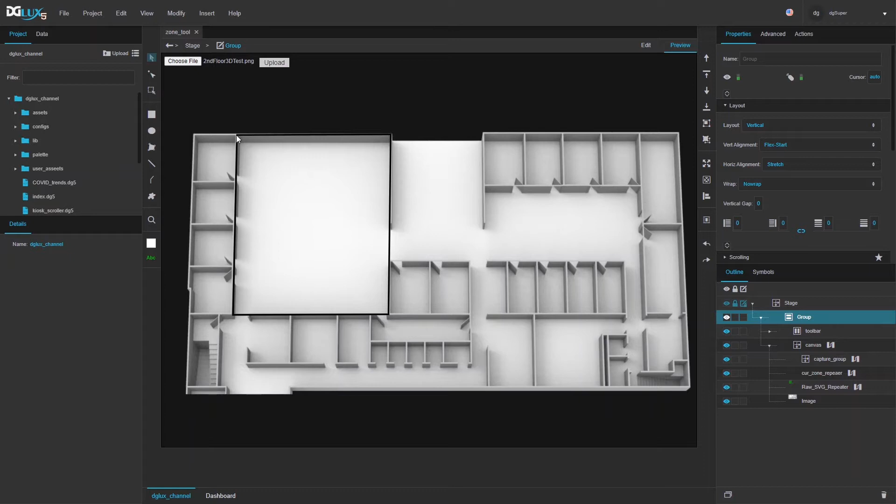One improvement that I want to make right away, which I noticed as I was playing with this tool, is that right now I'm tempted to try and finish the polygon by going back to the origin, which I actually don't have to do or should not do, right? Because when I double click, it will finish it for me. It'll draw that last segment for me. But because intuitively I'm trying to finish the polygon myself, I always end up with one extra vertex somewhere here, because at the last second I remember, oh yeah, I could have just double clicked on the previous one, but now I'm here, so I have to double click.

So we're going to address that first. Basically, what I want to do instead is to always have a closed polygon so that it's pretty clear that you don't need to finish it off yourself. So for that, let's travel to our capture group. This is where, if you recall, the currently drawn zone is being generated. And here it is, right? So this is the block that creates the concat of the zone that's currently being drawn.

So let's go ahead and start drawing it like this, and we'll just keep it here. So here, if you notice, this is basically what I've already plotted, the set of coordinates I've clicked, and I'm adding the current X and Y of the mouse, and that's what is drawing my black lines here. So in addition to doing that, I'm going to add one more coordinate. It's going to be a space, and then one more coordinate that will connect my mouse to the origin.

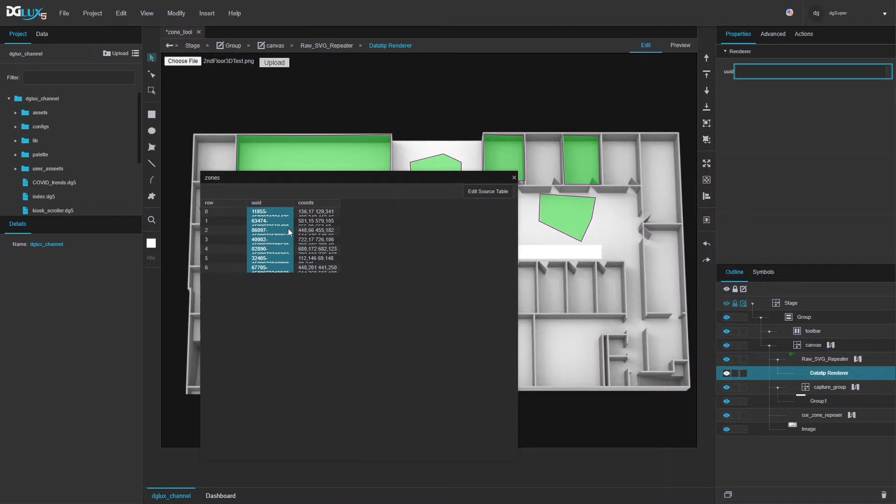And I need to open my table, go to this renderer that I now have here, the data tip renderer. Unfortunately, I cannot edit this in place, so I cannot do right-click, edit. Otherwise, everything would have been much simpler. This will be available soon, but it's not at the moment. So I need to take UUID column and bind it to my UUID property of my renderer. It looks like it's already pre-bound, I think because I was playing with it earlier, and it just kept the binding in memory. Ignore that. So basically just take UUID column, not a cell, but a whole column, and drag it over.

So now, if I did it right, when I mouse over a zone, I should see a data tip with the zone's UUID, right? And that's exactly what I'm seeing. And each one has its own, so I'm not seeing the same thing over and over again. Perfect. Now I need this same data tip to write it to this block here. So I'm going to go back and edit my tooltip. But because I cannot edit the renderer, I go to the one that's already sitting on my screen here and edit it from here. And data flow. And this is the non-intuitive part.

So I'm going to use a state block. Now, the target of my state block. So this state block will write that UUID. It has to write to the outside of the Svg repeater. So I cannot drag anything here to populate this path because I'm inside a symbol. And also I'm inside a symbol instance that is a completely different context compared to what it will be when it's rendered inside a Svg repeater. So I cannot populate this target path by dragging. However, I can type, and that's what I'll do.

So at stage, now this gets you to the symbol root level. Then at parent, this goes one level above the symbol, basically outside, which would be your Svg repeater. Then dot hover zone, that's the name of my string block that I designated. I want to keep my zone ID that I'm hovering over. Dot value is the property that I'm trying to affect.

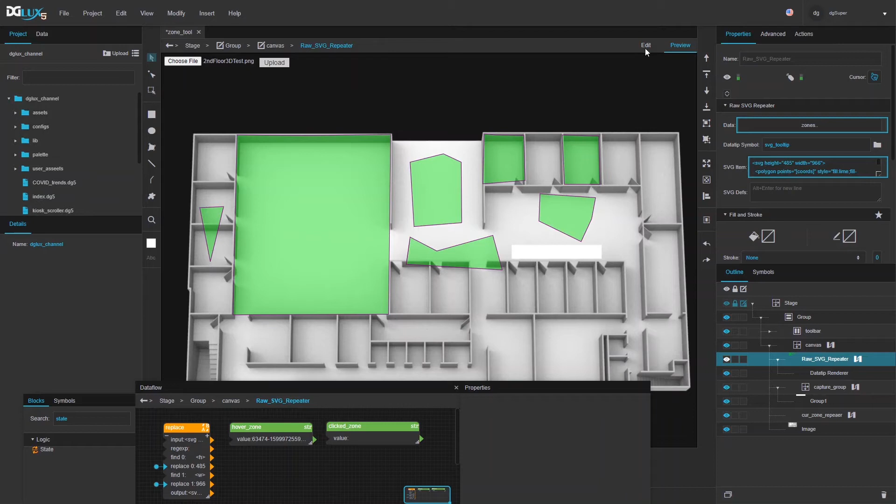However, what is not happening is I'm not clearing it out when I hover out of the zone. The last hovered zone ID is still there, so I don't know technically if my mouse is still in the zone or not. So we can fix that by force clearing it out when I'm over the capture group. Remember, because in between the zones, the capture group captures the mouse.

So I'm going to use a state block. All right, so my target will be, of course, this, my hover zone. So value will be null because I want to clear it out.

I also want to enable disabling serialization so it does not get serialized. And by the way, I have to do the same inside the symbol, so clear it out here as well, so it's not going to get saved with the page.

I'm going to invoke this state block on the mouse move of my capture group. So basically, anytime your mouse is over the capture group, it will clear out my hover zone.

Okay, so let me go ahead, while I'm still remembering, I'm going to go into my SVG tooltip and turn off serialization on this state block as well. Again, it's a good practice to do that on any state block where you don't want the value that it writes to be saved with the page.

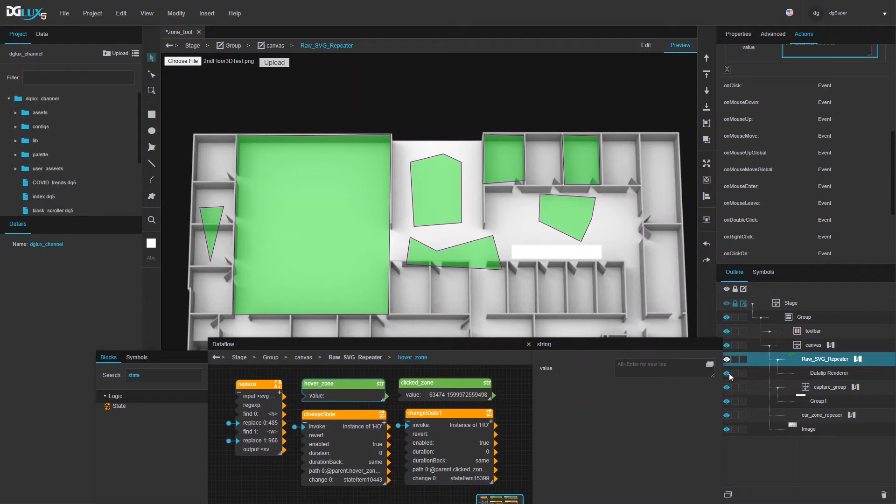Now we're ready to actually change styling based on that information. Okay, so for that, let's go ahead and get both of those values, take them with us.

So we'll have to come back here and go to the logic of my SVG code, which is, I believe, somewhere... yeah, actually, it's right here. So in order for me to be able to insert parameterized values, which would be, of course, the opacity and the fill color, into my SVG code, they have to exist in the table. Otherwise, I can only hard code them. Hard coding would not work here.

So first, I need to go back to my table that contains all my zones, which is here. Right now it only has UUID and coordinates. I need to add a few more fields, but not literal fields, because I don't need to type values in them. I need to use a column mapping block to add two more columns, which will be calculated.

Right, so input will be my zones table, and of course I'm taking all the original columns with me. I'm adding a column called opacity, I'm just going to use OPP, and one more called color, like so. And they're going to come, let me move this out of the way, so their values will come from an expression.

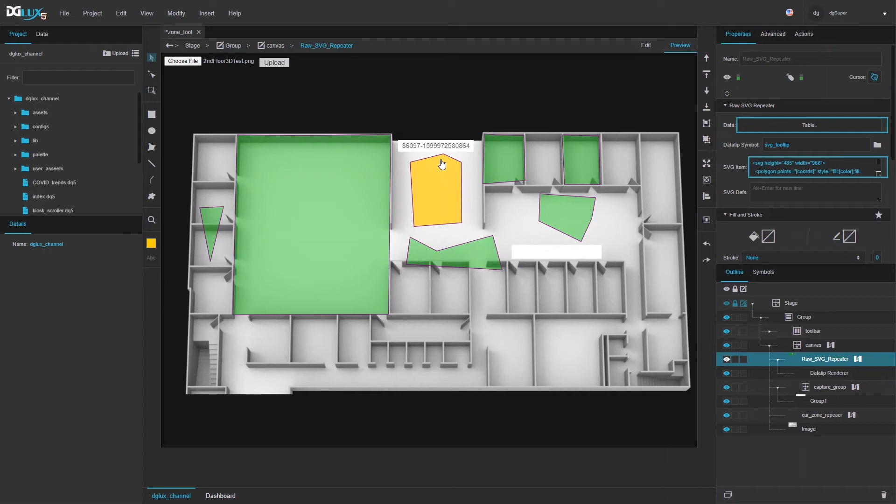Now that it works, we are ready to actually visually hide this data tip, as we don't actually need any visual aspect of it. I'm going to go back here, edit this, and simply turn off visibility. And done. I can delete it from here now - remember, I'm not deleting the actual symbol, I'm just deleting this instance that I used to edit the symbol. The symbol itself is still perfectly happy here in my symbols.

So we have a drawing tool that knows basically when you hover over a zone and when you click on the zone. We're ready to make use of this new functionality.

The first thing that I want to do using this is add the ability to delete a zone. Right now we have no way to delete it there other than going to the table and manually deleting a zone that we don't need.

So let's go ahead and add the delete button. We can add it right to this toolbar on top. I'm going to insert another group laid in there, horizontal laid out, flex end basically, so components will be stacked on the right and vertically centered inside. Let's call it tools. Inside I'm going to add a button - just regular text, saying delete. It's going to be white text on a red background.

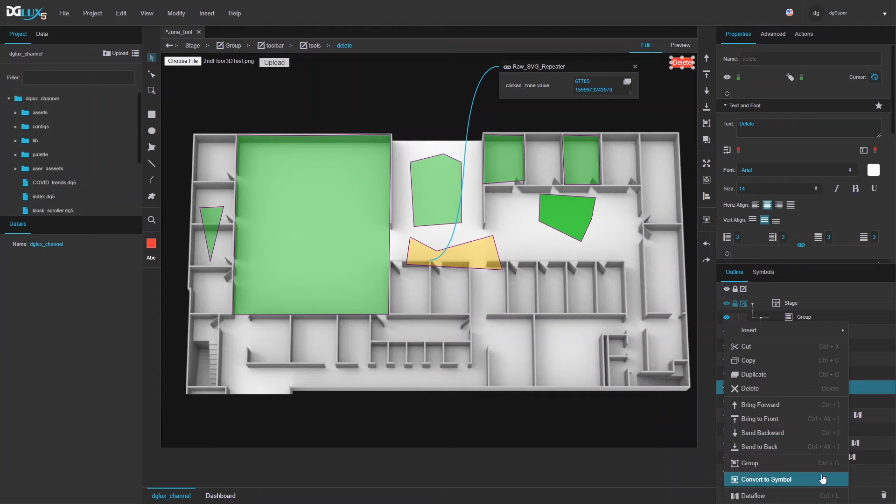Go to our button. Oh yeah, one more thing. Need the actual table that contains all the zones, because to delete anything, we actually have to delete it from this table. So take both with us, and now go back to the button, and let's create some logic.

So if you remember prior lessons in this channel, we're going to need to use remove rows to delete something from a table. And so this zones is the table, that's the target.

We need a condition. The condition will be dynamic because we need to check for this UUID. That means replace block or concat block, depends on your preference. And again, expression - actually no, here we don't need equals. This is not a column mapping block. So here we can just say UUID equals,

UUID. Right, so UUID is the column name, and this will be our placeholder, which we are going to replace right here with actual UUID. So that's the expression that we'll get, and we'll use it in our condition here.

And of course, the click of the button is what's going to execute this. However, oh yeah, one more thing I want to happen after that is executed: I want to make sure that we clear out the clicked zone, right? Because right now, if we delete a zone, this value will stay in there, but the zone will no longer exist.

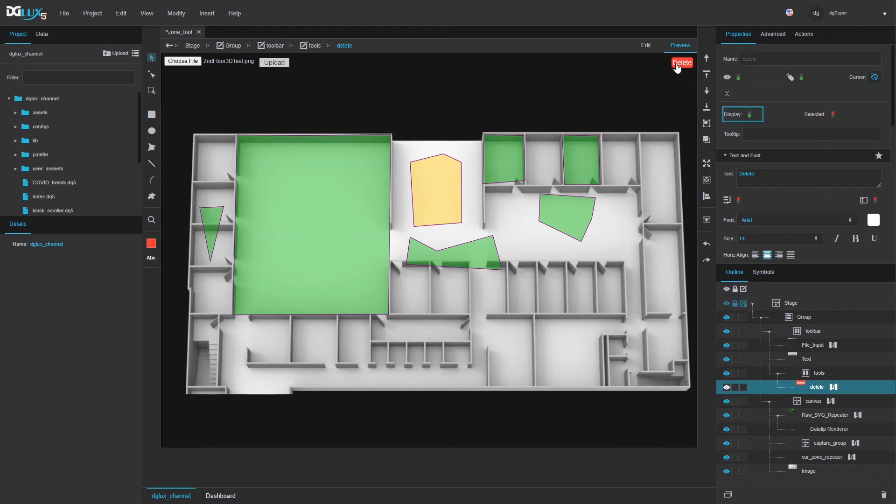Data flow doesn't tell us anything interesting. So click a zone, you delete, right, done. Click a zone, you delete, and we're done. Okay, so that part works pretty well.

Next step - so we can now create a zone, we can now delete a zone. We need the ability to add some information about that zone. Just want to stick with two properties for now, name and node. Node would basically be a path of the device that controls that zone. In my case, let's say a VAV.

All right, so I have a VAV box mapped somewhere in my server, and I want to keep the path to that VAV with the zone, so later, when I render this somewhere else, I know where to go for data. So for that, we're going to need to create a simple form. Let's get started with that.

All right, so we're going to start by just adding a group. Everything starts with a group. And giving the group some basic sizing, maybe 300 by 250. Give it a background so we can tell it apart. I'm also going to give it a box shadow, so it appears to be over things, and some rounded corners because I like them. And I'm going to make it a symbol right away. So convert to symbol. I'm going to call this zone data.

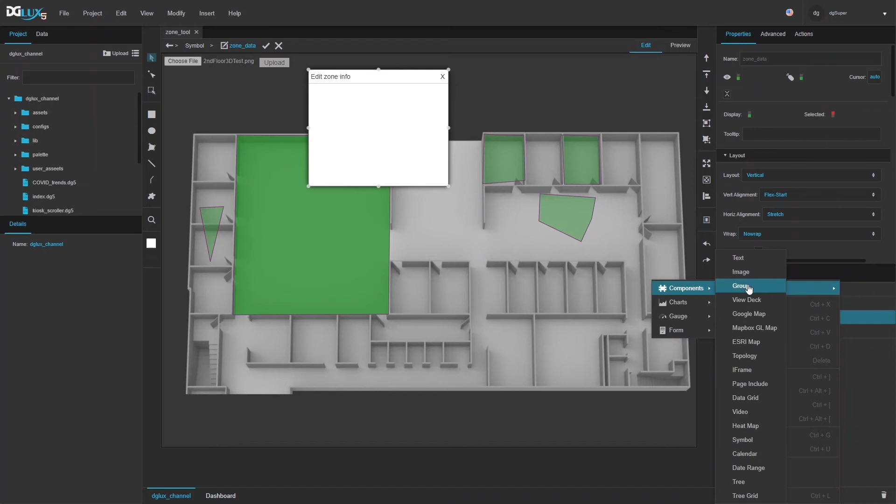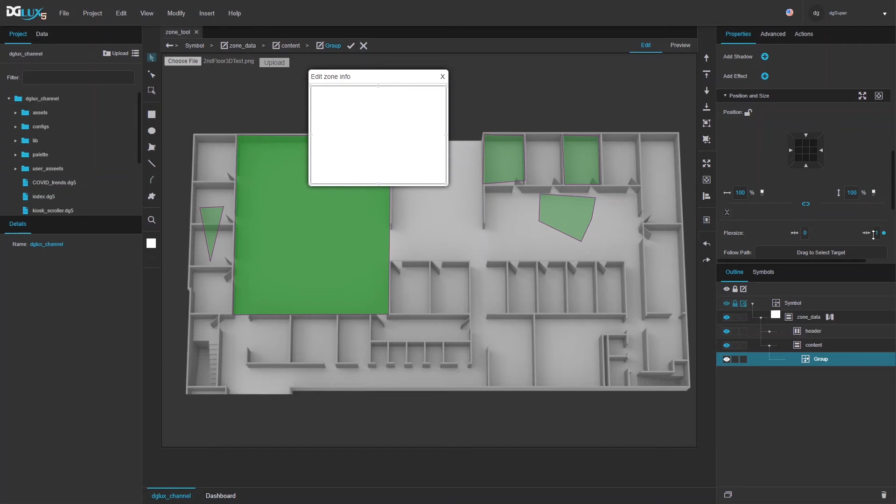So next, I'm going to add a group. I'm going to call it content, and that's the one that's going to contain the properties that I want the user to fill in. Add some spacing all around, and add another group, which is going to be a single property. So full size and no shrink. And fixed height, right? That's going to be the group. Horizontal layout, center vertically. Another text in there.

So text. This is going to be the name of the property, or label, that is. I'm going to make it fixed, 90, just so that things are aligned when I have multiple. Right, so this is going to be zone name. Let's call this prop. 10 pixel gap. And I'm going to insert a form element, text input. Right? This is where a user will be able to type things in. 100% wide, but flex, shrink, and grow enabled, so it only grows enough to fit 30 pixels.

A little bit of rounded corners, frame around it, and white background. All right, and need to give it a little spacing on either side, like this. So primary font will be dark, very dark gray, and then placeholder will be kind of barely visible. So remove the text value from here and set placeholder as zone name. And so you just prompt it to enter the zone name.

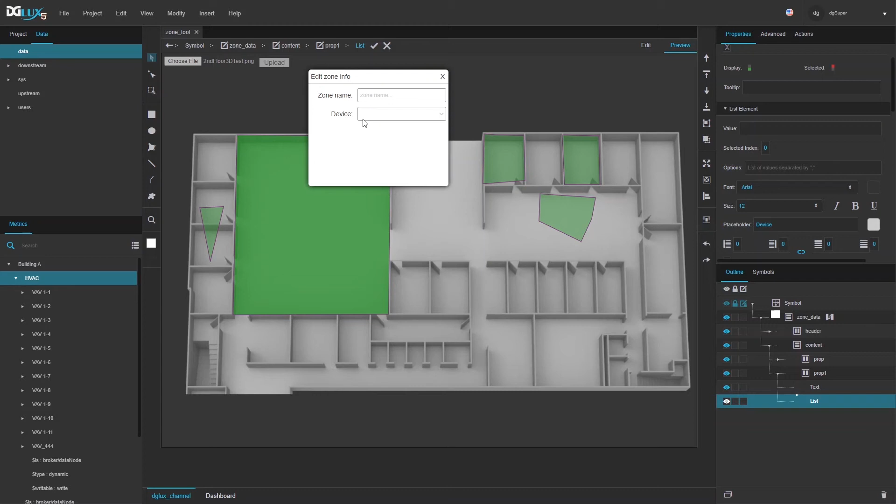So where am I going to get values? Well, if I recall from prior lessons, I have some mock VAVs created here. Let me go ahead and delete the new node. Don't need it. So I just have VAVs and nothing else here. I'm going to use these to populate my list. So I'm going to use list node, and I'm going to use HVAC as my parent, holding control so it doesn't bind, but rather populate the path.

And so this is what it gets us, right? What I care about is name and path. But what I want is a combination of these two. So I can use comma-separated values where each value is a colon-separated label and value pair. Let me show you what I mean. I'm going to use column mapping block. You see that I use this block a lot, and that's the case. It's one of the most commonly used blocks when you work with data.

So I'm going to call my new column value. I'm not going to take any other columns with me, right? And value is going to consist of name column plus colon plus path. Right, so this will look like this as the result. So name, then colon, then the path.

And you have to be careful. If your name could be strictly numeric, then this may error out because it's going to try to add a character to what it thinks is a number. So in this case, you would have to make sure this does not happen by first casting it to string type like this, and then it won't try to do math with your name. Instead, it will actually do a character operation by adding that column.

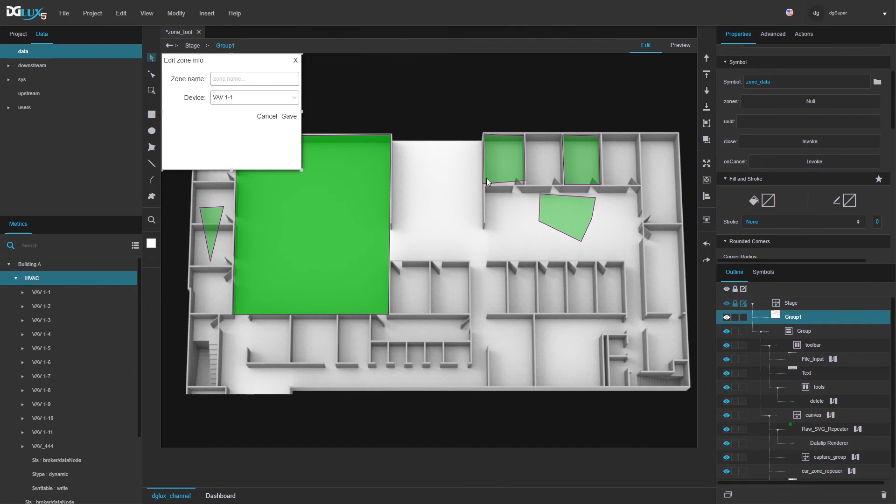So with that, I'm going to save the changes. I'm going to delete this from here, that instance that I created. It's still here in my symbols. And I'm going to actually use it as a callout on my canvas. Right? I cannot add a callout to individual zones because they don't have a callout property. I may want to have another callout at some point, so I'm going to add a callout to the SVG repeater itself. So I'm going to expand the callout section.

Remember, you can add a callout to just about anything. So I'm going to choose this type of callout that comes with 2 events to show and hide the callout, and just center it on screen. And I'm going to use what I've just built, which is zone data symbol, as the symbol for the callout. There it is, nicely shown here. 0 animation on load, so it doesn't fade in, but rather just appears.

I am going to make it modal, so nothing else can be touched while it's popped up, and kind of gray out the rest of the screen a bit so you can tell that nothing can be touched. So auto size it. Right? This is where those settings where I set auto size and height pay off. And that's it. So this is my callout render here.

So now I can grab my close event and just bind it straight to the hide trigger, right? Because we know what's going to close the callout, this close event, which nothing triggers yet, but we'll do that inside the callout. Right, show trigger. So what I think I want to do to show is a right click. Rather than using this clicked state, I want to use a right click on the zone to show this pop-up. But I want to make sure that I'm over the zone when I'm right clicking, and only then show it.

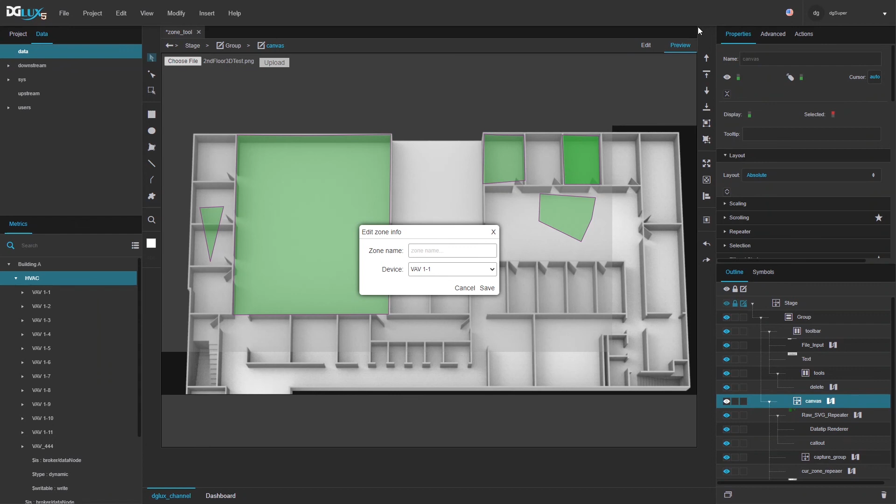Otherwise, there'll be nothing to edit. So name and path. Now let's watch the magic happen. All right, so we'll just keep this table open and cross the fingers that everything works. So close it out. Well, we know the close works now.

So let's do right click. Let's call this zone meeting room 1B-A. The device that controls it will be VAV 1-3. And we're going to save. Oh, we ran into a small bug in here. Looks like we lost.

Yeah, that's okay. So that's going to happen because of how these form controls work. The modality of the callout is not always enough. So when it goes from your drop-down list back to the form for the brief moment, it will actually detect a mouse underneath and think that you moused out, which is bad. We don't want that because when you mouse out, you lose that ID.

So now this form is sitting there without an ID, so it cannot save anything to the table because there's no ID to match. So let's fix that. So to fix that, instead of binding UUID to the form, which basically will appear and disappear as you mouse in and out, we're going to write it. So unbind, pop it up. We're going to write it and then on the right click.

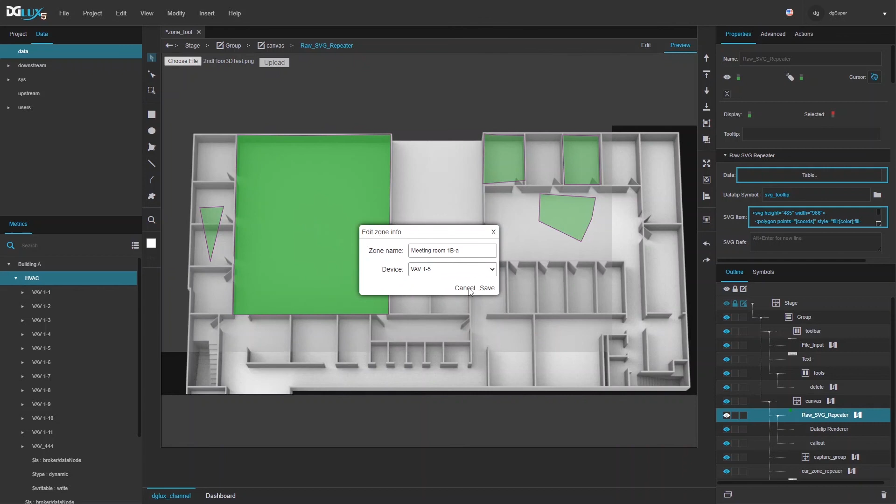When I pop it up, it shows that it's already there. So let's go to another one. Here, nothing is here. So let's call this Bob's office. Hopefully this apostrophe is not going to kill us here, but it shouldn't. 1-6, save. So when we go back here, this is meeting room 1B. We go here, right click. This is Bob's office. Okay, so one last step, I promise.

Basically, we need the ability to take all this information we've just accumulated about our zones, wrap it up, and save it somewhere so we can use it. The items we want to save are this table, everything inside, so I'm going to pop it up. And the path of the floor plan image. Clicking around too much. So this path here, I'm going to bring that as well.

And lastly, I also want to save the size of my canvas. We're not doing much with it, so we could technically just get the size from the image, but if we ever add any scaling options, it'd be nice to carry the size with us. So these 4 items I want to turn into a JSON and save as a file so that in the next episode we can use that file to render this stuff.

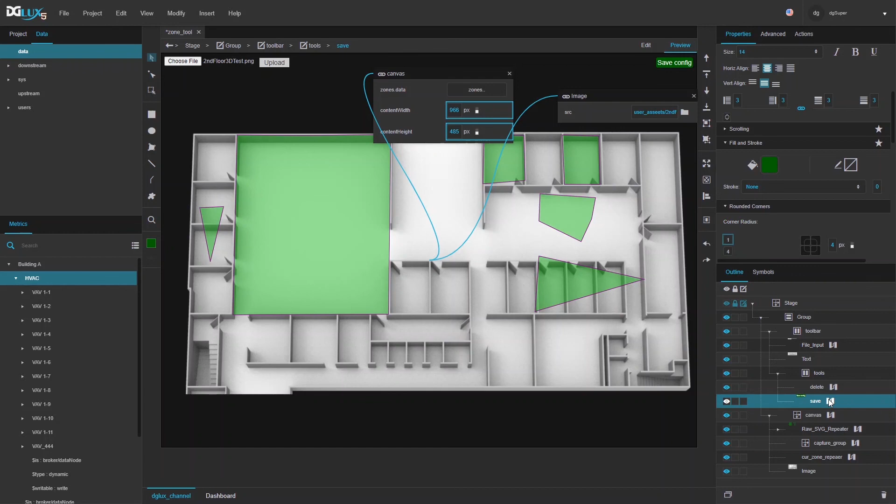So let's go into the toolbar, and I'm just going to duplicate the delete button because I'm somewhat lazy. It's going to be a save button. Maybe save config. And it's not going to be red, let's make it green. For now, it'll just be visible. That's not very nice. Darker green. Right. So it's not going to have any remove things in here for sure.

So what I'm going to do is use make object block here, and I'm going to add 4 things. One will be a table, so this will be my geometry. One will be a string, image path. And two would be width, numeric of course, and height.

So our zones table will go into geometry. Image path will go into, of course, image path. Oops, my height didn't come out to be numeric, so one more number, height. Then width and height. So it creates this JSON object that contains all that info. What I want to do is just save it as a JSON file. So for that, if you recall prior lessons, string uploader.

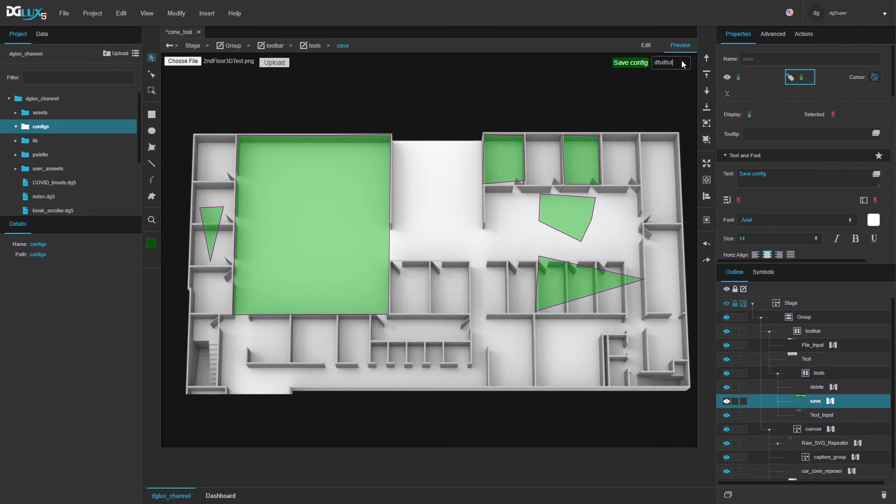So let's give it a name. It's visible. So that should do it. Let's click it. Save. So that's our JSON. We just saved everything we've done, and that should be enough information to go anywhere else and render the whole thing: the floor plan and zones and zone names and all that good stuff. But that's all for next week. For now, this is as far as we go.